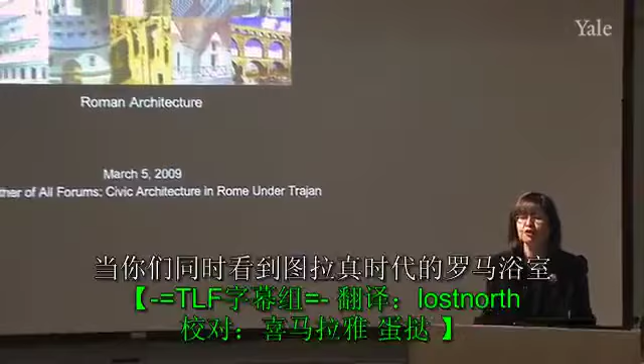Today's lecture I have called, as you can see, the mother of all forums, civic architecture in Rome under Trajan. And I think you'll see what I mean when we look both at a Trajanic bath building and also the forum of Trajan in Rome, what I mean by mother of all forums. These were gargantuan buildings, bigger than anything that we have seen before, and interesting in all kinds of ways.

We left off with Nerva, with the Emperor Nerva, and you'll recall that Nerva was old and in fact also relatively sickly when he became Emperor of Rome. You'll also remember, and I remind you of his portrait on the left-hand side of the screen, that he was a member of the Senate and that he was chosen by the Senate, one of their own, to become Emperor of Rome, the first emperor to come from the senatorial ranks in the history of Rome.

Nerva recognized quite early on that although he was popular with the Senate and with the aristocracy, he was not a favorite of the army. And he realized that was not a good position to be in, and so he wisely decided very early on that he would select the most popular military man and the most highly successful military man in Rome, a man by the name of Trajan, as his heir.

And so Nerva adopts Trajan, and you see Trajan's portrait on the right-hand side of the screen. Nerva adopts Trajan in 97 AD, so that in 98, when Nerva dies, because he dies after only 16 months in office, Trajan succeeds him without contest. Trajan was an extraordinary emperor for Rome.

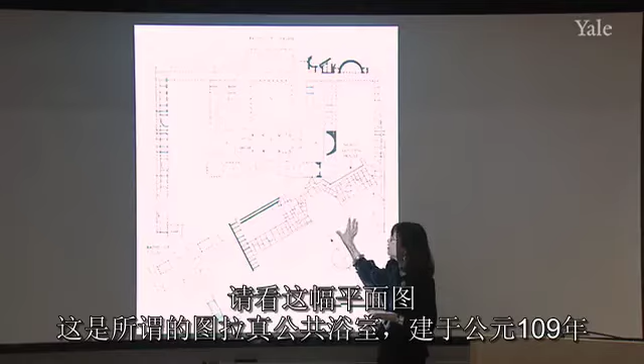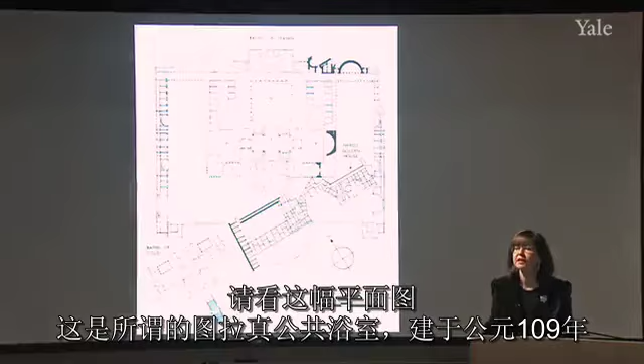And I show you a view here, in fact a plan of the so-called Baths of Trajan in Rome that were dedicated in AD 109. As you can see from the monument list, we know the architect in this particular case. It is Apollodorus of Damascus, and his name says a lot about him. Apollodorus from Damascus, modern Syria. So it's very interesting. We have an emperor from Spain and an architect from Syria who work together. This is a sign that things are beginning to change in the Roman Empire as Trajan extends those borders even further. It brings in even more multifaceted civilizations around the world, and talent begins to pour into Rome from all of those places.

Apollodorus of Damascus, as we'll see today, was an extraordinary architect, right up there with Severus and Celer and with Rabirius. In fact, one could argue even the equal of Rabirius. And what's particularly interesting is that Apollodorus of Damascus, like Severus and Celer before him, appears to have been, above all, a great engineer. He actually accompanied Trajan on Trajan's military campaigns and served as Trajan's military architect. So his first commissions were building bridges. I'm going to show you a reference to one today.

Building bridges or building forts and camps on Trajan's military campaigns, and then using that expertise, ingratiating himself with the emperor, because Trajan participated in these campaigns himself, seeing how talented he was, and then putting him in charge of his building projects in Rome, which is really quite interesting. And so these projects are not only aesthetically pleasing and fascinating, but also show extraordinary engineering skill on the part of the major designer, namely Apollodorus of Damascus.

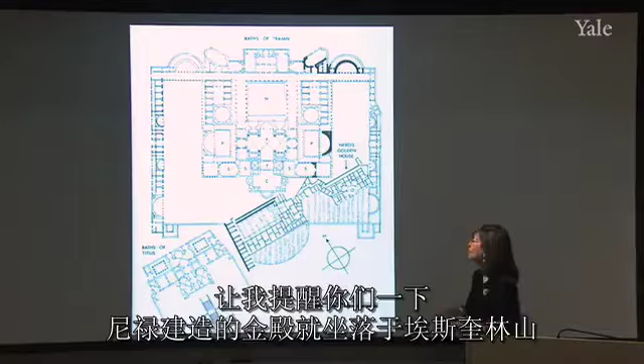Now, these baths of Trajan are very interesting in all kinds of ways. You can already see by looking at the plan their location. They are located on the Esquiline Hill and part of the Oppian Hill, which I don't think I've mentioned before, the smaller Oppian Hill. And the baths of Titus, well, let me remind you first that the Domus Aurea of Nero was built in part on the Esquiline Hill, and you'll recall the so-called Esquiline wing, which is the one wing of Nero's Domus Aurea that is still preserved underground. You'll recall that after Nero's Damnatio Memoriae and the coming to power of the Flavian dynasty, Vespasian and Titus and even Domitian razed to the ground Nero's buildings.

Vespasian did that, and then he and Titus and Domitian built new buildings on top of those, and chose to make those buildings the kind of public buildings that the citizenry as a whole would enjoy, from the Colosseum amphitheater to the baths of Titus. And you see again the baths of Titus here, located right on top of this area that originally belonged to Nero's Domus Aurea. Trajan follows suit.

He not only is interested in public architecture like Vespasian and Titus before him, but he follows their lead in building these buildings on top of earlier structures, now destroyed, of Nero. So it's again the same message, giving back to the people the land that Nero had taken illegally from Rome during his reign.

The baths of Trajan are based in large part on the plan of the baths of Titus, with some additions, but you can see the extraordinary difference in scale. The baths of Titus were not small, and yet the baths of Trajan are at least 3, if not 4 or more times the size of the baths of Titus.

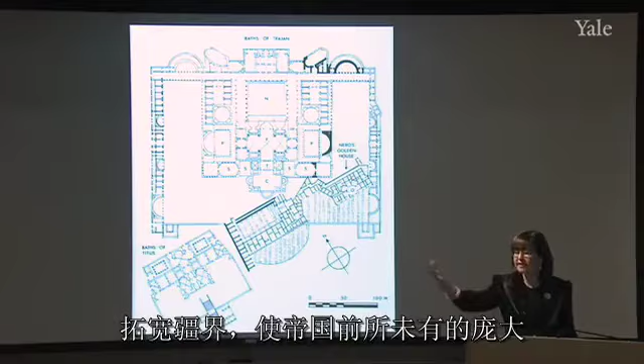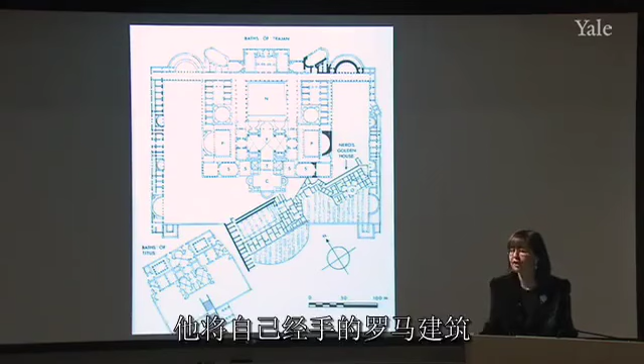But we're getting even more ambitious vis-a-vis scale, and perhaps again I'm psychoanalyzing Trajan too much, but I think the fact that this is a man who had the ambitions that he did to extend the empire to its furthest reaches seems to be in keeping with the kind of man who would want to make the buildings he built in Rome a kind of microcosm of that hugely expanded empire.

With regard to the plan of the baths, you will see that it follows the so-called imperial bath type that was initiated by the baths of Titus, at least with regard to baths that are still preserved. I mentioned to you when we talked about the baths of Titus, there may have been an earlier bath of Nero that actually followed this same imperial bath form. That is, the Neronian baths. They existed, but we're not absolutely sure about their plan.

But if we look back at the baths of Titus, you'll remember that what made them distinctive and different from the earlier Stabian baths or Forum baths at Pompeii was the way in which they placed the bathing block in the center rather than to the side, that they arranged the main rooms, the tepidarium, the frigidarium, and the caldaria, in axial relationship to one another, and then all the other rooms of the bath were displayed around those in a symmetrical way. So axiality and symmetry reigned supreme. And otherwise we saw here the rest of the precinct with an elaborate entranceway over here.

We see roughly the same in the baths of Trajan, in that again the bathing block is located right at the center of the structure, and the main rooms are aligned with one another axially. If you look up to where it says Baths of Trajan, at the northern end is the entrance into the baths. You enter from there into N, which is a natatio or swimming pool, a piscina, and you can see that is surrounded by columns.

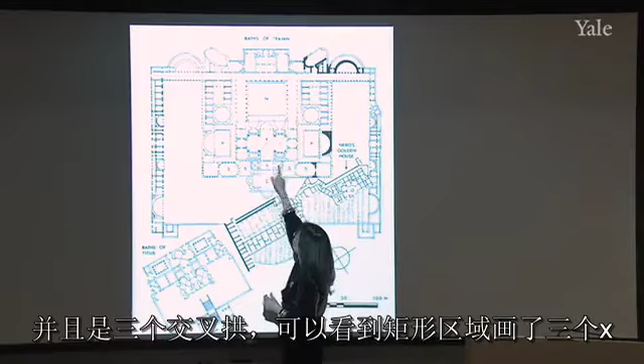On axis with the swimming pool is the frigidarium at F, and you can see, just like that of the Baths of Titus, it is a groin vaulted room, a triple groin vaulted room, as you can see by the three X's over the rectangular area. It has a kind of apse or exedra at the uppermost part, through which one comes from the natatio into the frigidarium, and you can see that is screened by columns.

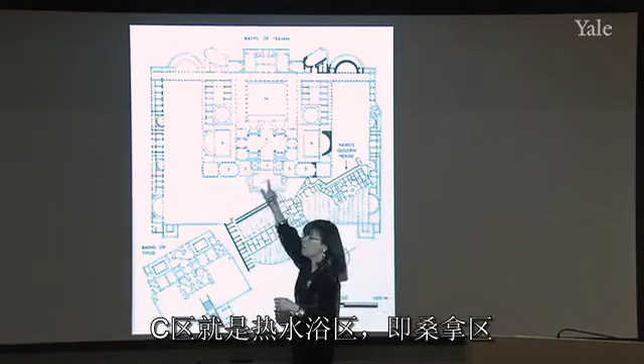Then from there into the fairly simple rectangularly shaped tepidarium that serves more as a kind of passageway from the frigidarium into C, which of course is the caldarium, or the warmest room, the sauna of the baths. That also has a rectangular shape, but with these radiating alcoves, which we're going to see are screened by columns, and they are facing the southern end where the sun is, and that would of course help to heat the caldarium as well.

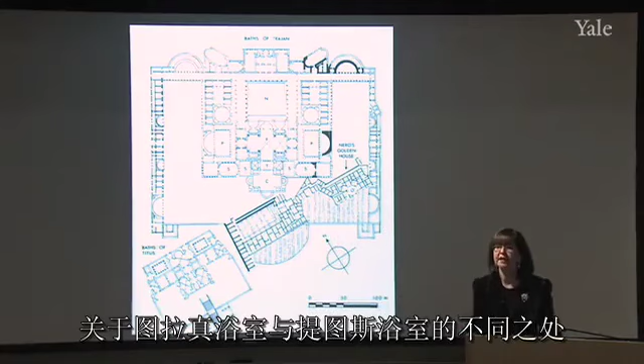And then what we see though with regard to the baths of Trajan that make them differ from the baths of Titus and are part of this evolution of imperial bath architecture in Rome is the fact that the bathing block is placed in this very large rectangular precinct. And this large rectangular precinct has a series of rooms around it, as you can see, real rooms, and rooms that take all kinds of shapes.

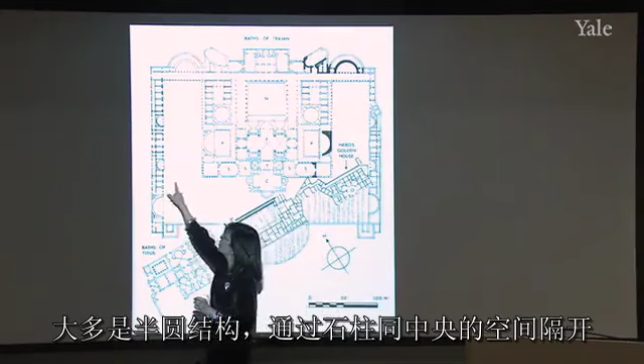Many of them are these hemicycle type shapes, screened with columns from the larger central space, but some of them also look like the tabernae that we've become used to in plan. We see all of those there, and these were used, as far as we can determine, as meeting halls, lecture halls, Greek and Latin libraries.

So this is this extension of the bath from being just a place where you went for wellness, essentially, to bathe and to relax and to have social interaction with your friends. They are adding an intellectual element to the bath buildings, so that you can also go there if you want to read, if you want to go to the library, read Greek books, read Latin books, go to lectures, go to seminars. Intellectual conversations are also beginning to happen here.

So the bath becomes even more of a mecca for people who are interested in intellectual life as well as bathing and social life, which is a very important development culturally for the Romans. Note here also this great hemicycle down here, which is part of the bath building, a hemicycle that had seats on it, which probably served for performances of whatever kind that would have taken place here.

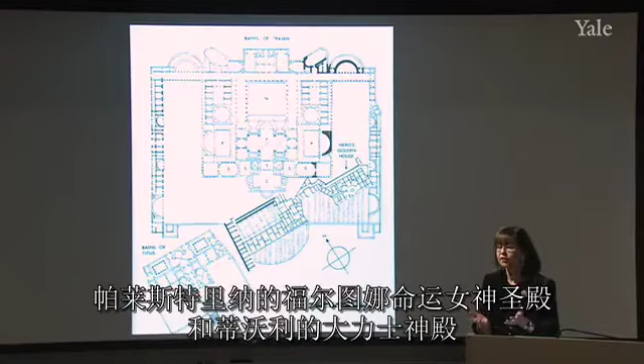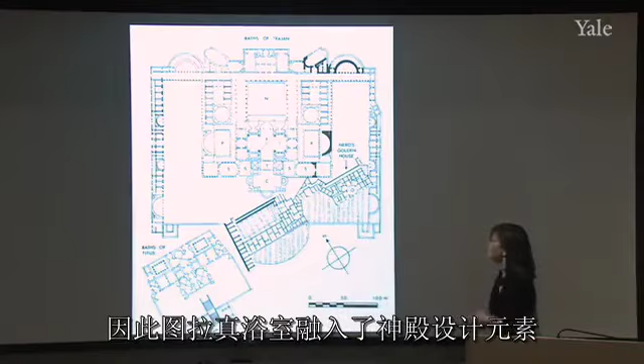So that's another interesting addition to the bathing scene, and should remind you of the kind of hemicycles that we saw, for example, in the Sanctuary of Fortuna Primigenia at Palestrina, or the Sanctuary of Hercules at Tivoli, where they also had those performance areas. So bringing in some of those elements from sanctuary design into bath design in the baths of Trajan in Rome.

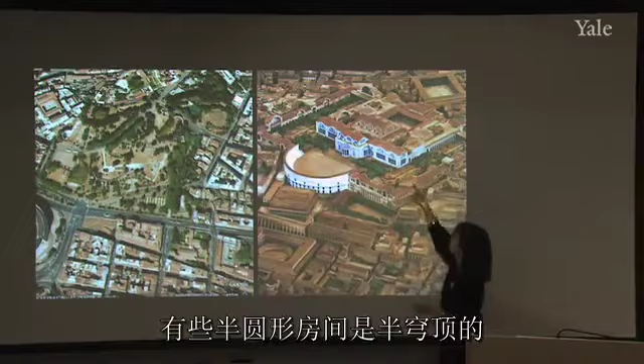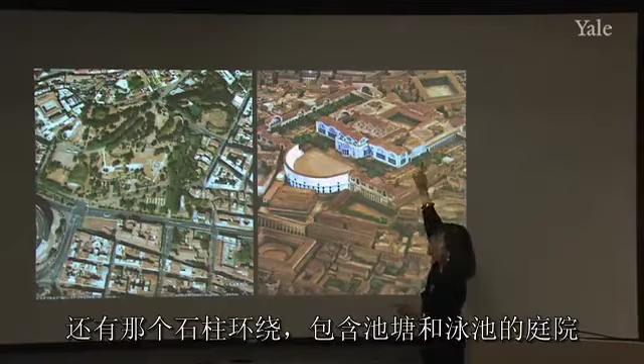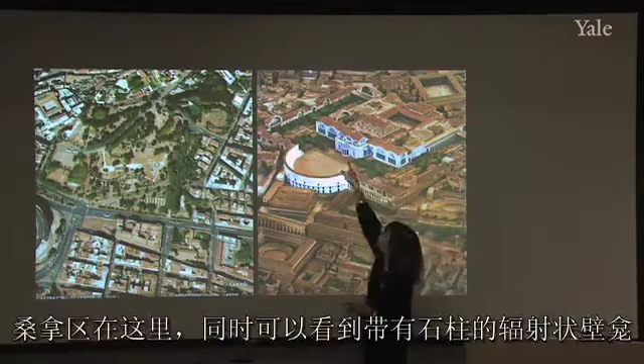We can see the semi-domes of some of the hemicycles here, and we can also see the bathing block at the uppermost part: the entranceway, the courtyard surrounded by columns, which is where the pool or natatio was located. The covered area here was the frigidarium, then the tepidarium. The caldarium is here, and here you can see those radiating alcoves with columns that open them up for vistas and the like, as well as to the warmth of the sun.

So an incredible bathing establishment, and one that has taken us a step further in the evolution of imperial bath architecture in Rome, and will serve as the major model for the two most famous and much better preserved baths in Rome, and that is the Baths of Caracalla and the Baths of Diocletian, which we'll look at later in the semester.

But I'd like to turn from the Trajanic baths to unquestionably the most important public building that was commissioned by Trajan during his reign, and I can't overemphasize enough the importance of this building in the history of Roman architecture. We're going to see that it is two-part in the sense that it has the forum proper, and it also has markets appended to it. They are done in a different architectural style and herald a very important development in Roman architecture that's going to be carried further by Trajan's successors.

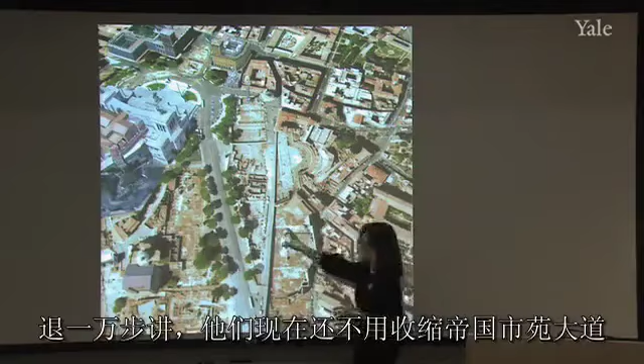But what you see here is that park has been replaced by structures because they are excavating. I've mentioned this before. They are excavating more of this now with the hope of someday rejoining the Roman Forum with the Imperial Fora. That may not be able to happen because of traffic concerns, but it is certainly something that's on the drawing board. And at the very least right now, without narrowing the main street, the Via dei Fori Imperiali, they are doing excavation in that park area, and you can see what they've brought up.

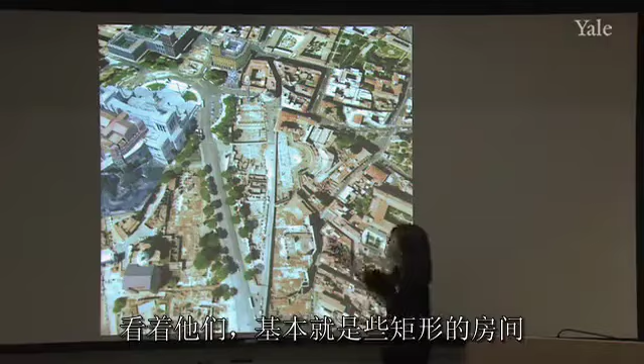This is not ancient. It's actually mostly medieval houses. I hope there are no medievalists among you, but I hope they'll eventually realize that they should probably remove these as well and take us back to the original Forum of Trajan. I hope that happens someday. They're not very distinctive. They're just mainly rectangular rooms, but nonetheless, they're at that medieval level now, and the question is whether they're going to go down any further.

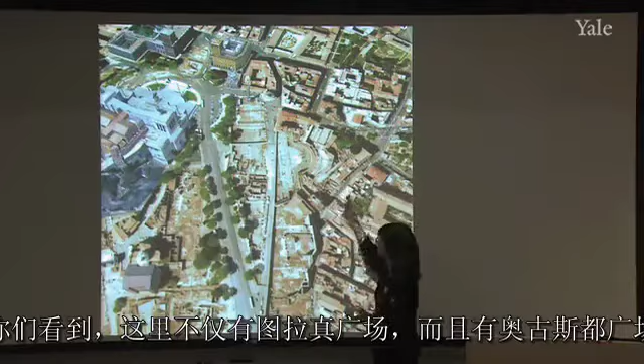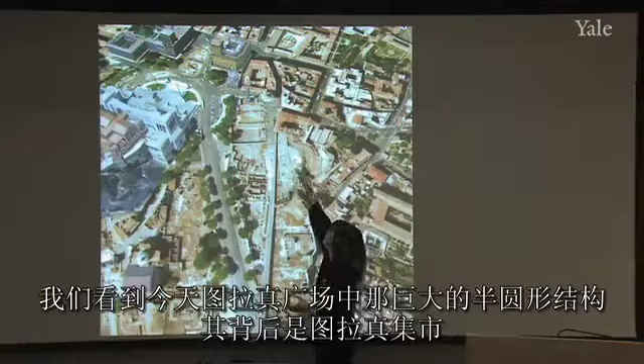But here you can see not only the remains of the Forum of Trajan, but also the Forum of Augustus. Here's the Temple of Mars Ultor, that great precinct wall that divided it from the Suburra, also visible here. And here we see the great hemicycle that we'll look at today of Trajan's Forum, behind it the markets of Trajan. It's important for us to look back at the general plan of the imperial fora to see where the Forum of Trajan fits in.

We have already looked at the Forum of Julius Caesar with its temple of Venus Genetrix. We have looked at the Forum of Augustus with its temple of Mars Ultor. Remember the exedrae on either side of that temple, the embracing arms that were new at that time and an important component of the Forum of Augustus. Vespasian adds his Forum Pacis over here.

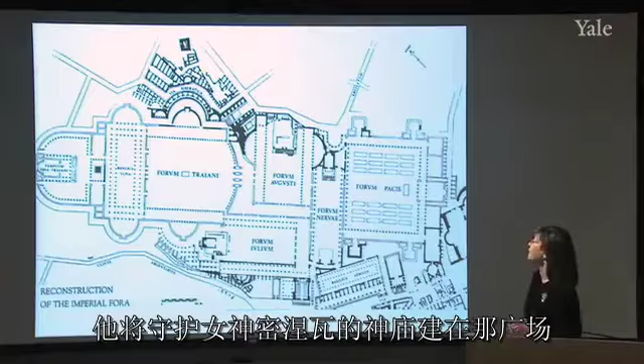Domitian adds a narrow forum, the so-called Forum Transitorium, that served as a point of transit between the Roman Forum and the Suburra. Here it is that he puts a temple to his patron goddess Minerva in that forum, but at his death it is taken over by Nerva and renamed the Forum of Nerva.

I mentioned to you when we talked about the Forum Transitorium that Domitian also had his eye on this property over here. He had schemes as grandiose for public architecture at one point as for palatial architecture, but palatial architecture won out, and he put all of his effort into the palace on the Palatine Hill and never realized any construction in this area. When Trajan became emperor, he decided that he would again focus on public architecture and that he would build a forum like none other before it. And so he begins to do that.

Now that was no small feat in this particular part of the city because most of this area was occupied by a hill, the so-called Quirinal, Q-U-I-R-I-N-A-L, the Quirinal Hill in Rome, occupied most of this space. So what he needed to do, it's great to have an architect-engineer in your back pocket. So he set Apollodorus of Damascus to work. He said, you're a great engineer. All you need to do is take down a good part of the Quirinal Hill to make way for this great forum that I want to build. And lo and behold, Apollodorus was absolutely up to the job, and that's exactly what he sets out to do.

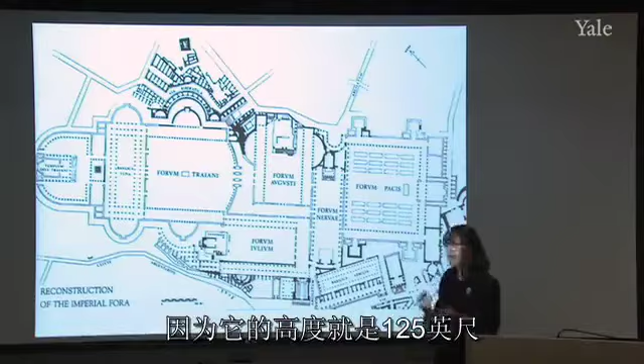He removes 125 feet of the Quirinal Hill in order to make way for the Forum of Trajan. And that very number, 125 feet, is actually commemorated in the Column of Trajan, because the Column of Trajan was built to that very same height, 125 feet, to show you, as you stand in the Forum, how much of that hill had to be cut back in order to make way for the Forum.

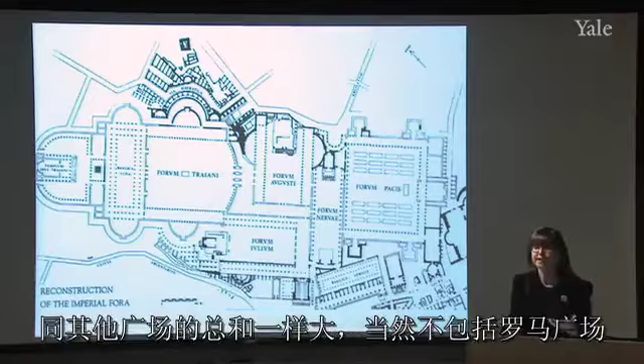You can see by looking at this plan of the imperial fora as a whole, not only did Trajan take the empire to its furthest extent, this is the last forum that was added to the imperial fora in Rome. You can see by looking at it in connection to the others that if you count it plus the markets, which you see wending their way up what was left of the Quirinal Hill here in plan, the Forum of Trajan and the markets of Trajan were almost as large as all of the other imperial fora together, not counting the Roman Forum, which gives you some sense of why I call this the mother of all forums.

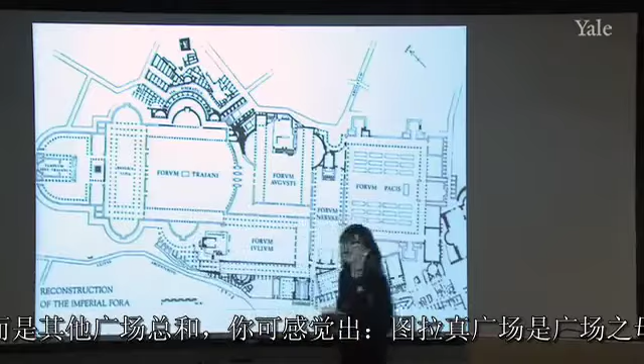Now we're going to look at the plan of this, and I'm going to show you an individual plan in a moment. But what I want to say while this is still on the screen is that I want you to look at the exedrae that you see on either side of the main space of the forum and on either side of the basilica over here. These are not coincidental. They are certainly meant to make reference to the exedrae of Augustus's forum.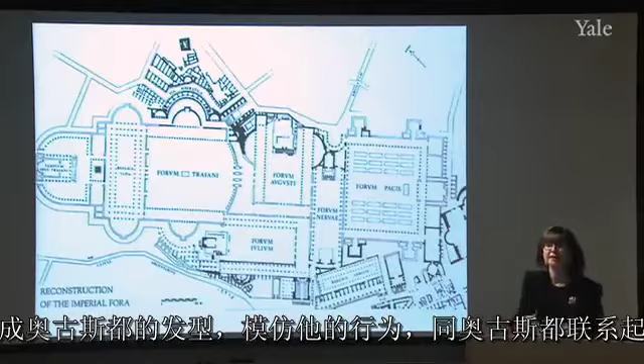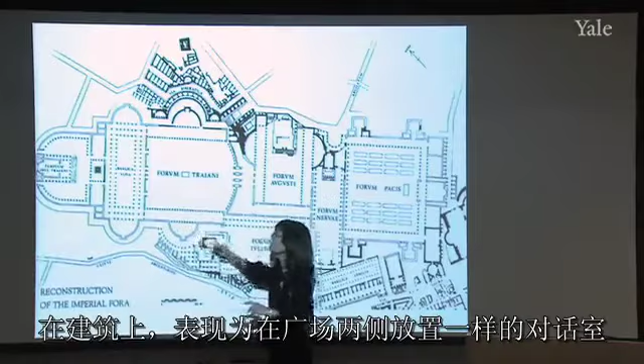Trajan modeled himself after Augustus. He became a kind of neo-Augustus. He took on Augustus's hairstyle and his manners, and so he was trying to associate himself in his life with Augustus. He's doing it here also through architecture by placing those exedrae on either side of his forum.

A convex facade, which is very interesting, curved facade, with an elaborate entranceway over here. The entrance into the main part of the forum, rectangular in shape. There's a base here for an equestrian statue of Trajan. The exedrae on either side mimicking those of the Forum of Augustus. Colonnades also on either side, and some additional columns here.

And we're going to see that just as in Augustus's forum, another reference back to Augustus, the columns in this main area are Corinthian below, but in the second tier there are figures. Not figures of caryatids, but different kinds of figures, and I'm going to show you those soon.

Over here, the basilica, which is perpendicular to the forum proper. This is quite different from the forum at Pompeii, where you'll remember the basilica was splayed off to the side. Here we have it as a more integral part of the forum and perpendicular to the main space here. It's a very large basilica. It takes the name of Trajan's family. His family name was Ulpius, U-L-P-I-U-S.

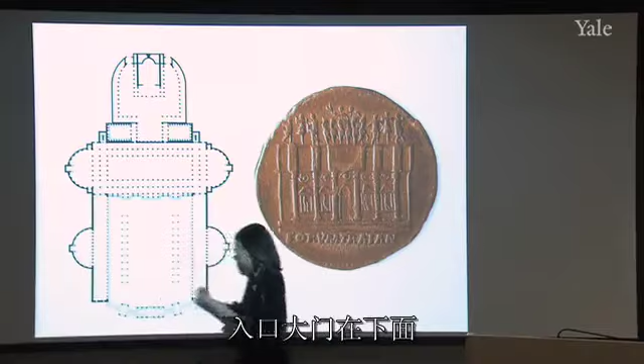Now we know quite a bit. Some of the forum is still preserved, and we have evidence for other parts of it that are not preserved. This entrance gate down here, believe it or not, we have coins that have an entrance gate on them, and fortunately, they say down below, Forum Traiani. Forum of Trajan. So putting two and two together, we have to go on the assumption that what we are looking at here is a rendition on a coin of the entrance gate into the Forum of Trajan.

And if we look at it here, we see some interesting things. We see, first of all, that it has a single arcuation in the center, so one doorway. It has a series of bays that have in them what we call aediculae, A-E-D-I-C-U-L-A-E, which are niches with little temple fronts around them with columns and pediments, and then you can see statuary inside those. So a series of bays decorated with these aediculae with statues.

Then a series of circles with blobs in them. I think those are probably the portraits represented on shields, because we have remains of actual portraits on shields from the inside of the Forum, so that seems to be the case here as well.

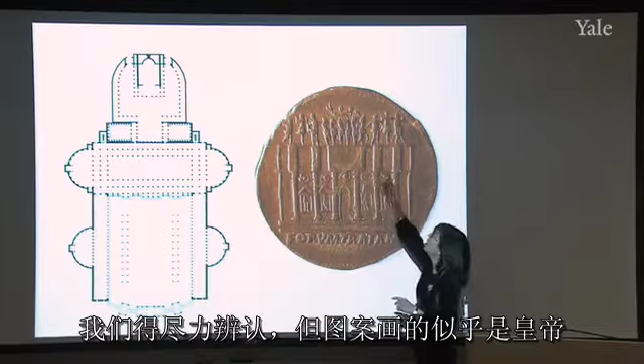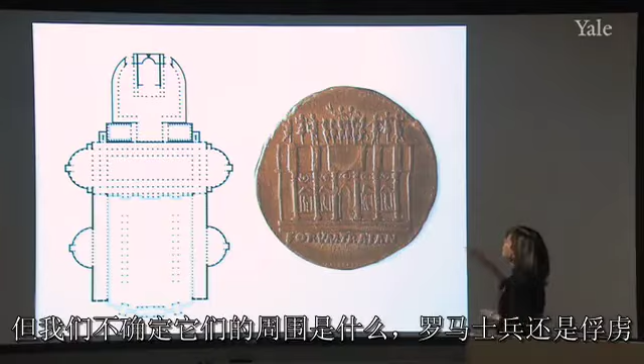And then in the uppermost part, we see that the gate looks very much like an arch in the sense that it supports a quadriga at the top, and that quadriga represents two people. Again, we're dealing with blobs here. We have to do the best we can to interpret them. But they seem to be probably the emperor and possibly Victory crowning him the way we saw Victory crowning Titus in his chariot on his arch. Six horses in this particular case, and then on either side trophies, these tree trunks decorated with captured arms and armor. We're not absolutely sure what's surrounding them in this case, whether they're prisoners or Roman soldiers.

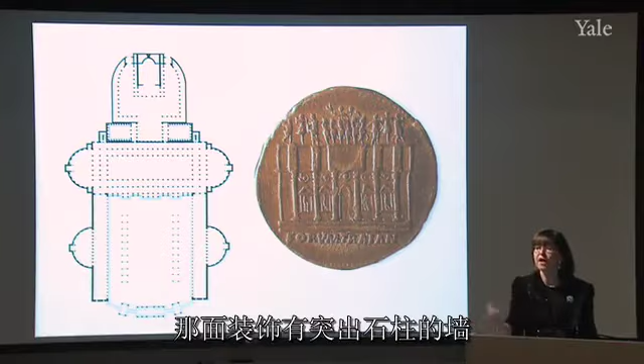So this gives you a very good idea of the entrance gate into this structure. And I also want to point out, if you look very closely at the columns and the elements above them in the attic, you can see that the columns project and the attic seems to have projecting entablature. So it looks as if we have the kind of scheme here that we saw in the Forum Transitorium, with that wall decorated with columns that project out of the wall and that have projecting entablature, giving this undulating movement from projecting to receding across the facade of the entrance gate.

The figures that were located on the upper tier of the center of the main body of this Forum, again, were not caryatids or female figures, but rather male figures of captured Dacians, because the war that enabled Trajan to celebrate and to fund this building was his wars against the Dacians, D-A-C-I-A-N-S. Dacia, ancient Dacia, modern Romania today.

Trajan had 2 military campaigns there, the first one from 101 to 102, the second one from 105 to 106. He was victorious in both of those, and this forum was built from the spoils of that war to honor his victory over the Dacians. And we see, therefore, that the figures that are in the uppermost tier of the main body of the Forum are depictions of captured Dacians, of Dacian prisoners brought back to Rome.

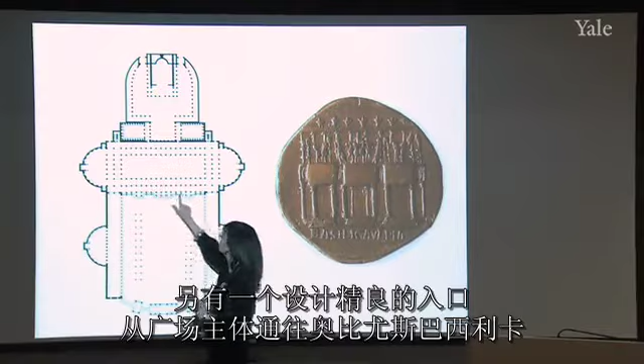The plan again, and here I just want to mention, looking back at that plan, that there was also another elaborate entranceway from the main part of the Forum into the Basilica Ulpia on its long side. And once again, how fortunate we are that we have coins that say Basilica Ulpia. So we can guess, I think quite accurately, that this must be the entranceway to the Basilica Ulpia.

Here we see something different. We see three openings, not arcuated openings, but trabeated openings, straight lintels above. But look again in the way in which they're represented. It looks like they're quite solid and that they project into the spectator's space. So again, this idea of projection, recession across this facade.

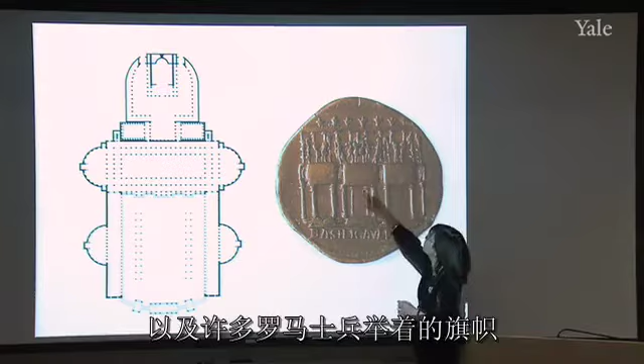This is very important because, as I mentioned, Roman architecture, using the traditional language of Greek architecture, ultimately developed something that we call a Baroque trend in Roman architecture, and you see it happening here in Rome based on the experiments of Domitian's Forum Transitorium. And you can see roughly that same scheme here. Up above, once again, a chariot, in this case a four-horse chariot, seemingly with one figure, and a series of standards being held possibly by Roman soldiers.

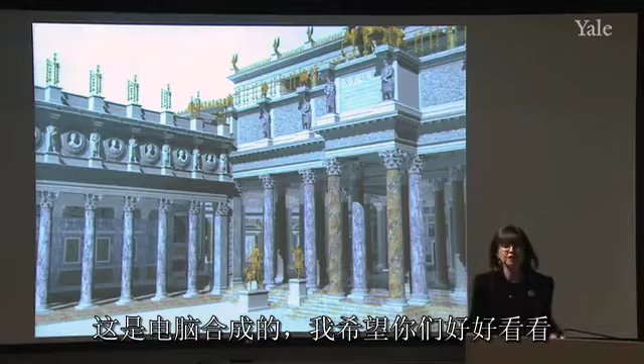The Forum of Trajan has been the life work of a professor formerly of Northwestern University, James Packer, who spent a very long time pulling together all the evidence that the Forum of Trajan still provides to allow a very good reconstruction of what that forum looked like. It's computer generated. I urge you all to look at it. If you just Google James Packer Forum of Trajan UCLA or the Getty, because the UCLA and the Getty supported this work, you will be able to see computer simulations of his work.

There's also a book by James Packer on the Forum of Trajan that's on reserve for this course. I send you to it less for the Forum of Trajan, but for any of you working on city plans, again, this could be a very inspiring book to look at.

Not that I expect you to come up with something like this, but nonetheless, I think it can give you an idea of what one can do as one thinks about designing one's own city. He has done enough research to allow a very accurate reconstruction of what this forum would have looked like.

We're looking at the entranceway into the Basilica Ulpia here. We are looking at the marble. You can see real marble and variegated marbles brought from all over the world. So Trajan continues the Flavian tradition of bringing marbles from all over, from places outside of Italy, from Africa, from Asia Minor, from Egypt, and so on, for the decoration of these buildings and an interest in multicolored marbles as facing.

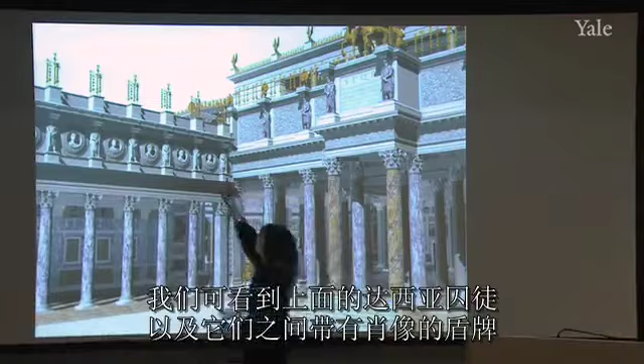We see also up here the Dacian prisoners, and between them, in this instance, these shields with portraits on them. We have remains of some of those, so that's an accurate reconstruction, the same sort of thing that we saw on the entranceway. Then up there, an inscription, several other Dacians, and some other decoration at the apex.

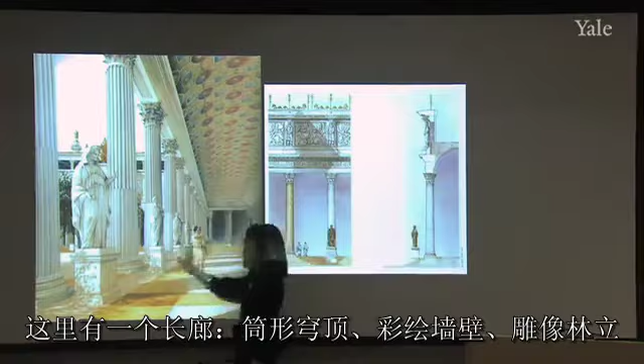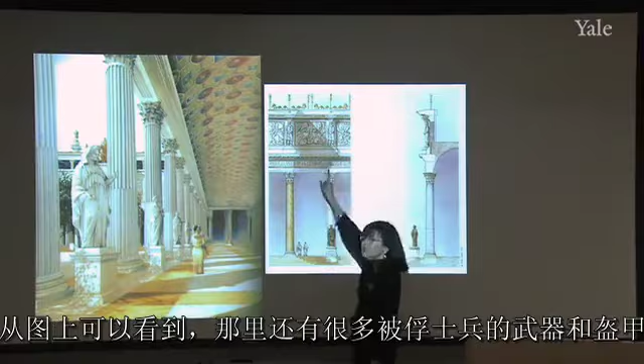I'm going to show you just a few of these quickly from Packer's book. You see here a corridor with a barrel vault, stuccoed and painted, lots of statuary. There would have been lots of honorific statuary in this structure. Sometimes, instead of the shields with portraits between the Dacians, we see piles of captured arms and armor, as you can see in that view.

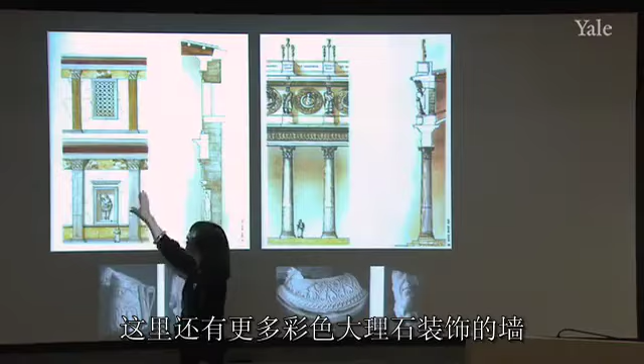Here, a couple more showing again the marble decoration of the walls, very varied in color. Here, niches with portraits. Over here, more shields with portraits. And here you can see some of the sculptural remains, some parts of a military figure in a breastplate, a man, both of them headless, a man in a toga, and over here part of one of these decorative shields with a portrait.

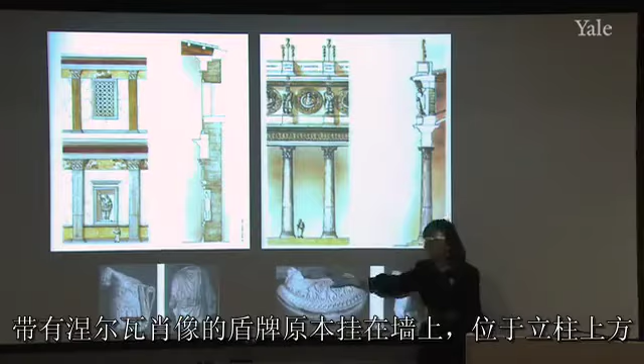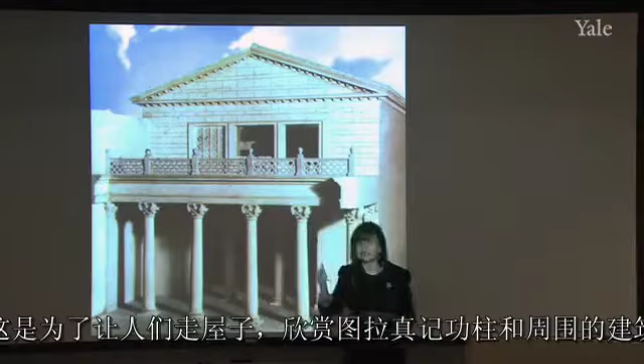This is a model of what we think the library, or both of the libraries, may have looked like from the outside, fairly smallish square buildings with a portico in the front, and then most important, a balcony over here. Why a balcony? So that you could come out and look at the column of Trajan and read some of the scenes that encircled it.

What he did, however, at that time was that he took the statues of Trajan that would have stood on this one and Marcus Aurelius on the other and replaced them with statues of Peter and Paul. And it's Peter who's on the column of Trajan and Paul who is on the column of Marcus Aurelius. But you can see how well preserved they are here.

The column shaft rests on a base decorated with arms and armor, Dacian arms and armor, with the bronze statue of Trajan at the uppermost part. But what's particularly interesting is the sculpture. I'm not going to go into that in great detail, but I want you to know about it because it does tell us something about architecture, as we'll see.

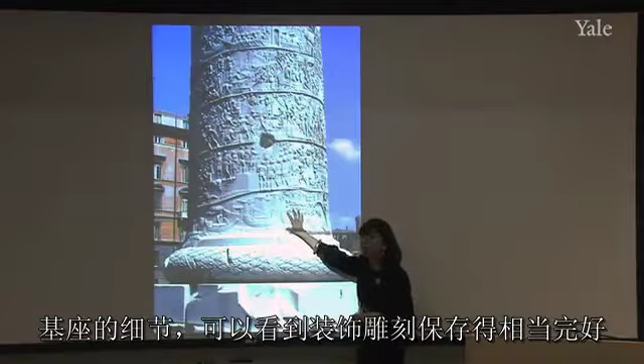A detail of the base, just to show you how very well preserved the sculptural decoration is. This is not a course in sculpture. I'm not going to go into this in detail, but I want to quickly show you some of the scenes because, again, they can be revealing from the point of view of architecture.

This is at the very base. We see a personification of the Danube River in that area up north in Dacia, where the Romans went to conquer those tribes. And this is very important because we know that Apollodorus of Damascus was responsible for building a bridge over the Danube River. It was one of his great engineering feats, and you actually see that bridge located here, which even increases the likelihood that Apollodorus of Damascus was the designer of this particular structure.

You see the Roman soldiers have gotten off boats. They're walking through an archway. Here you see the Roman soldiers. The Roman soldiers did not only do battle, but they also Romanized the areas that they went. We've talked about this a lot, the colonization of the Roman world, Trajan extending the borders to their furthest most points. The Romans get there. What do they do? They start to build architecture.

They start to build walls with headers and stretchers. They start to build forts and city walls in which they put buildings with Roman amenities. Remember, after the war is over, they're often given land by the general or the emperor; it becomes theirs and where they can live from that point on. So they had every reason to want to fill these towns with Roman amenities, and we see the Roman soldiers building cities in many of these scenes.

And I also thought I would mention, I'm sure all of you have been down to Ground Zero, but if you go a block or two away from Ground Zero itself, there's a firemen's memorial there that was put up to many of the firemen who sadly lost their lives fighting those fires in the Twin Towers. We see this here dedicated to those who fell and to those who carry on.

And what's interesting about this, if you Google this and look at the website for the Firemen's Memorial in New York, you will find out that the designer for this talks unabashedly of his admiration for the Column of Trajan in Rome, and that he used it as an artistic model for the way in which he massed figures here and showed them in relationship to buildings.

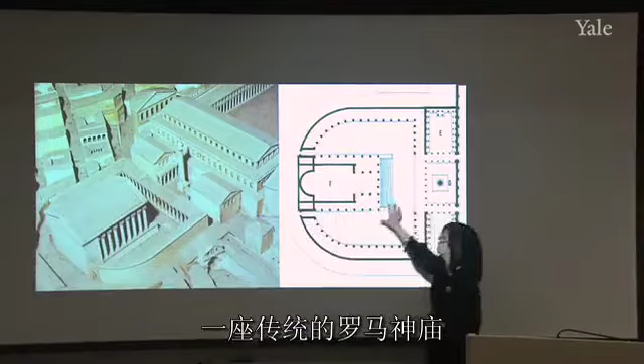He used as his model the figures on the Column of Trajan in Rome. At the end, again, the column surrounded by the Greek and Latin libraries, the temple over here at the end. You can see it's a conventional Roman temple, deep porch, freestanding columns, staircase, one staircase facade orientation, just as we saw elsewhere.

And if you read the inscription on the coin, you see it refers to Trajan as Optimus Princeps. Trajan received many titles. One was Dacicus, D-A-C-I-C-U-S, for his victories over the Dacians. But at the end of his life, Optimus Princeps, the greatest Princeps of all time. The implication, greater than Augustus. And it is arguable, I think probably correct, that Trajan was the even greater of the two.

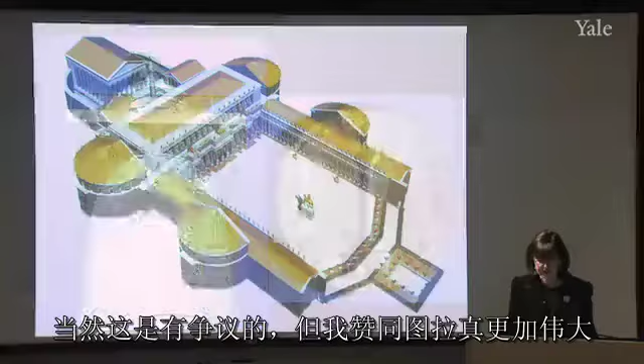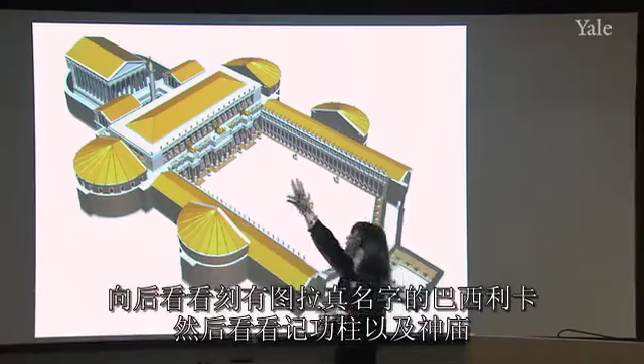This is a spectacular restored view of the building complex, where you can see again the entranceway over here, the equestrian statue, everything that we've described. But I think it's interesting, if you think of yourself having entered into this forum, standing here, looking back at the basilica bearing Trajan's name, looking toward the column and the temple, what you would have likely seen was only the uppermost part of the column, because most of it would have been blocked by the very tall Basilica Ulpia.

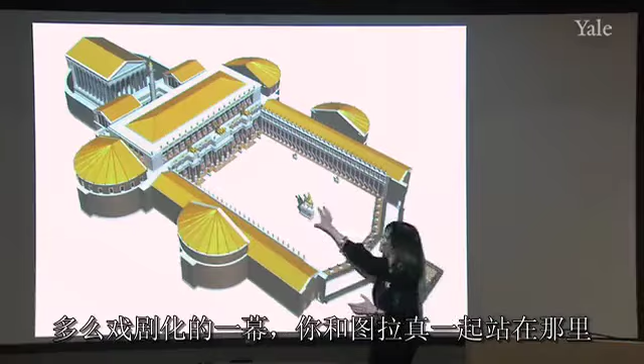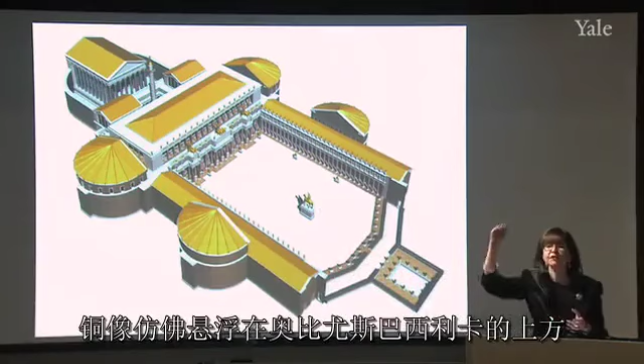So it's a very theatrical representation, in the sense that you would be standing here with Trajan during life, looking back toward that column, looking back at the divinization of Trajan, bronze statue, which would have seemed as if it was floating on top of the Basilica Ulpia. This is a very dramatic tableau created here by Apollodorus of Damascus, and I think it was not equaled until the 17th century by architects like Gian Lorenzo Bernini, who also created such spectacular tableaus.

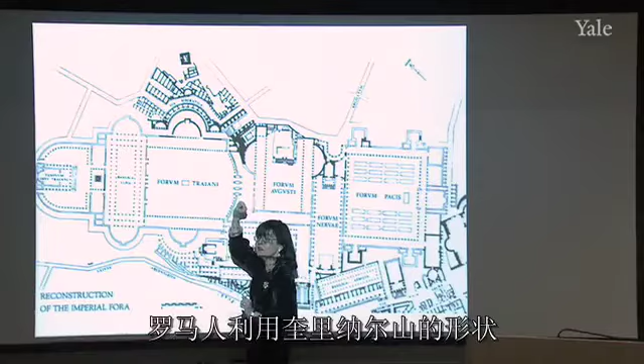Just to show you again the location of the markets of Trajan in relationship to the Forum of Trajan, while the Forum was the Romans imposing a rectangular plan on nature, remember they had to cut back the hill to make way for it, the markets are something quite different. They are the Romans accepting the shape of the remaining Quirinal hill and allowing the shape of that hill to determine the irregular shape of the markets.

The markets, unlike the Forum that is made out of marble, for the most part, as we've seen, variegated marble, are made out of concrete faced with brick, a very different material, but a material that is absolutely appropriate when you want to cover a hillside with tiered buildings, looking back very much to the Spa at Baia, looking back to the Fortuna Primigenia at Palestrina, the same idea, to turn what remained of the Quirinal hill into essentially the precursor of the modern shopping mall.

You have shopping, there are 150 shops in the markets of Trajan. All of these things date, by the way, to the same period, around AD 113, the Forum and also the markets. We see 150 shops here on a variety of levels. This is the bottom level, located where the first exedra is on the right side, a great hemicycle with shops. Here a street called the Via Biberatica, that name is on your monument list, and then a covered bazaar up here. All of this on different levels, all of this done in a very innovative way with concrete faced with brick.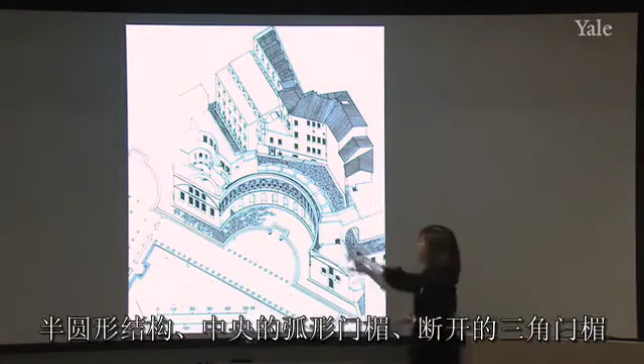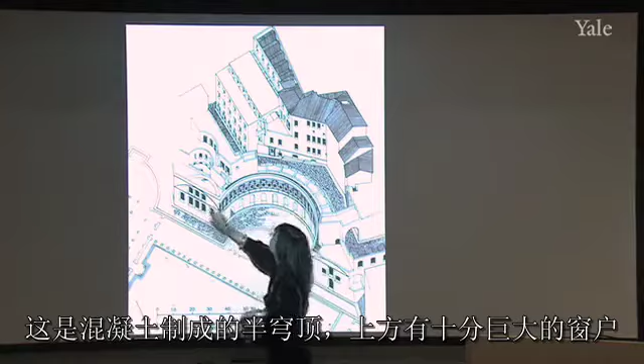A restored view of what the whole thing looked like in antiquity, the hemicycle, the decoration here of the central arcuated pediment, broken triangular pediments over here, a very interesting space that I'm going to show you in a second, vaulted with a semidome done out of concrete with very large windows opening up the space, the Via Biberatica that we already saw here, and then the covered bazaar up there.

A quick view of the semidome made out of concrete. It doesn't have an oculus, but otherwise it looks kind of like the dome of the Temple of Mercury at Baia, as you can see. And over here, this wall that I've already described that shows you how well the Romans can work concrete now, enabling them to open up the wall much more than they've been able to do so before and allow even more light into the structure.

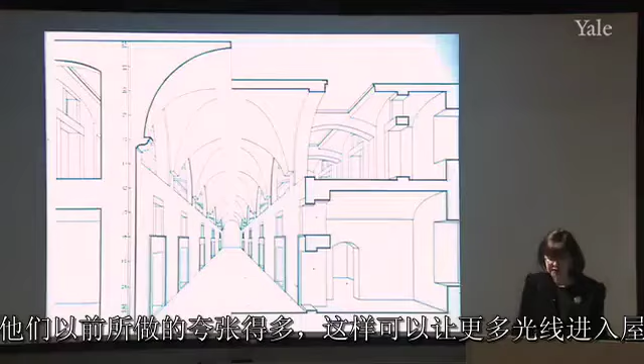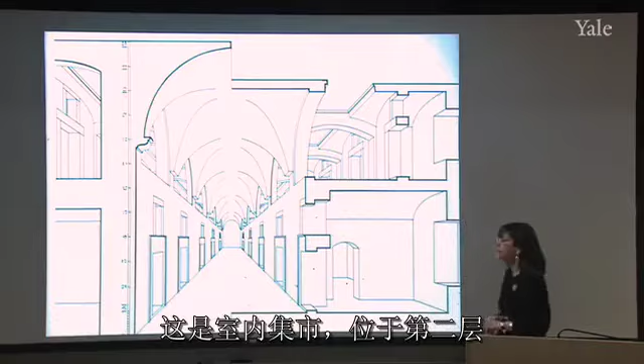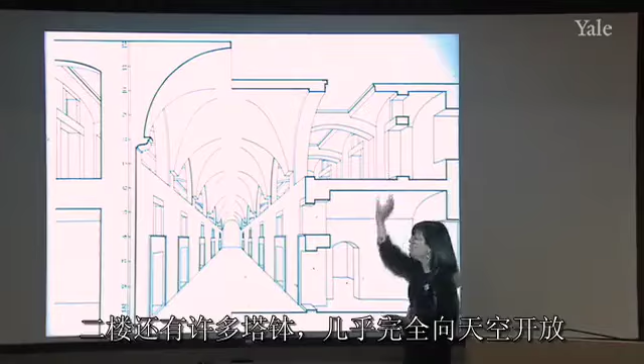The greatest part, perhaps, of the markets of Trajan is this building here. It's the covered bazaar, and it really is a market bazaar on two tiers. You can see in this restored view this series of tabernae down below, the attic up above. You can see that groin vaults are used here in an incredible way. I'll show you in a moment how. A second story up here with additional tabernae opened almost completely to the sky. An incredible feat on the part of Apollodorus of Damascus, assuming he also designed these markets.

Lift them up. I described this, I think, in the introductory lecture as, in a sense, opening up a series of umbrellas over the space. They have opened it up so that light can flow in from the sides, light can flow in from either long end, just flooding the whole system with light.

Down below, again, the typical markets with their attic windows above, but this is a real tour de force, probably the greatest, certainly the greatest vaulting that we have seen thus far, and again, a test to just how far the Romans have come from this to this by the time of the Emperor Trajan.

And any of you headed to San Francisco, if you go to the marketplace there, you will see that that owes so much to Roman antiquity, with all the tabernae-like structures on either side, the vaulting. I mean, this sort of thing absolutely presupposes this kind of architectural development.